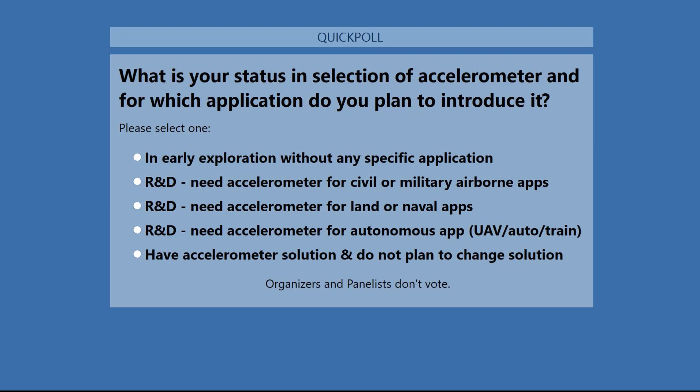But before we hear from each of these distinguished gentlemen, Lori, let's learn a little bit more about our audience. Let's do that. So you should see a poll coming up on your screen. If you wouldn't mind weighing in, we'd love to hear from each of you. The question is, what is your status in selection of accelerometer, and for which application do you plan to introduce it? Just select one answer. Responses are in early exploration without any specific application, in R&D and need accelerometer for civil or military airborne apps, in R&D and need accelerometer for land or naval apps, in R&D and need accelerometer for autonomous apps, or have an accelerometer solution and do not plan to change that solution.

So it looks like 36% in early exploration without any specific application, 23% R&D and need accelerometer for civil or military airborne apps, 10% R&D need accelerometer for land or naval apps, 17% R&D need accelerometer for autonomous apps, and 15% saying have accelerometer solution and do not plan to change solution.

So Alan, any thoughts here on this poll? Well, I think everyone is just about where they want to be, which is in the right place, ready to learn more about the new possibilities of accelerometers, except for the 15% who do not plan to change. But I have a feeling that even they will learn something to their profit. A third of the audience is in early exploration, and the rest are in various fields. Of course, this is going to be of interest to Thales and all of us as to which fields they are in. I think everybody, regardless of your application, you're going to learn something to your advantage.

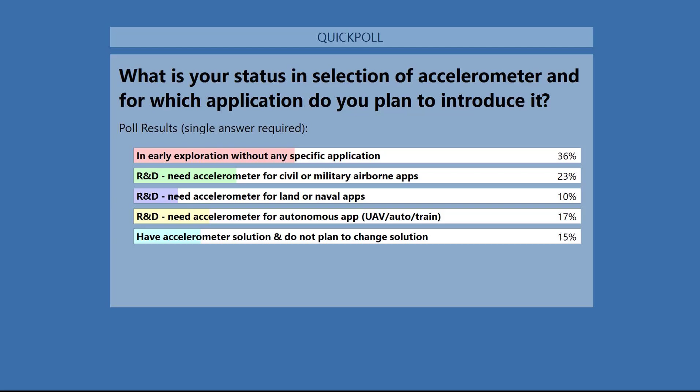We're going to hear first from Vivien Lagorce, who is the MEMS sensor project manager at Thales. He graduated in electrical engineering from Grenoble Institute in France and joined Thales Group in 2009. At Thales, Vivien has carried out the development of several power supply electronic products embedded in airborne applications, such as flight controllers, GNSS receivers, and inertial navigation systems. He has been in charge of their airworthiness certification process regarding European and U.S. regulations, and now Vivien is the project leader of the new high-grade accelerometer and gyroscope based on silicon microelectromechanical systems, in other words, Si-MEMS, and as you'll see frequently throughout the presentations, Si-A, or silicon based accelerometers. These sensors combine compactness with high-level performance.

Vivien, please proceed. Yeah, thanks, Alan, for this introduction. And thanks a lot to the webinar attendees. I'm glad to present you today the new generation of Thales high-grade accelerometer and how we're offering a user-friendly solution combining compactness and performance. First of all, let me introduce Thales and its experience in inertial technology.

Since 1980, Thales is embedded in major civil and military programs requiring high-grade inertial systems. Our expertise is based on our technological knowledge with more than 1,000 patents. We provide inertial systems based on our own sensors developed and manufactured, such as ring laser gyroscope and pendulous accelerometer, or also quartz MEMS accelerometer. In addition, our expertise in GNSS allows us to provide one of the most performant inertial systems. Today, we deliver more than 10,000 navigation systems per year and accumulate more than 300,000 MEMS sensors in silicon and quartz technology. Our MEMS sensors accumulate more than 1.5 billion operating hours in safety critical applications.

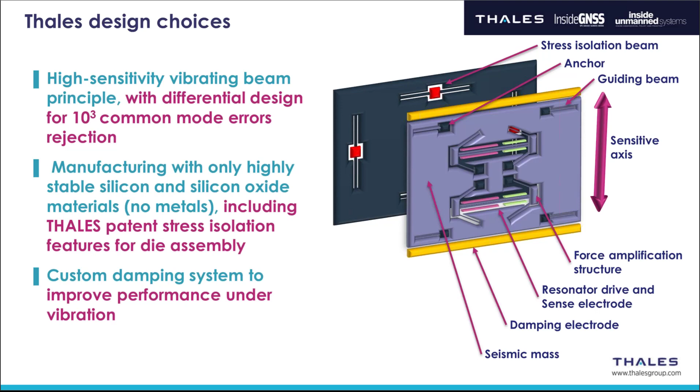We have also integrated a custom active damping system here, which allows us to improve performance under vibrations. Manufacturing of the cells uses only highly stable silicon and silicon oxide material, including the Thales patented stress isolation features for die assembly, located at the bottom silicon layer to link the active layer to the packaging.

All these principles come from several years of research to provide the best bias performance over the whole temperature range. This is a particularly important requirement, for example, in missile guidance applications with high temperature variations. Even if the physical principle seems to be complex, its use should remain simple for you. For that, we have designed the electronics to facilitate communication with the sensor and its use.

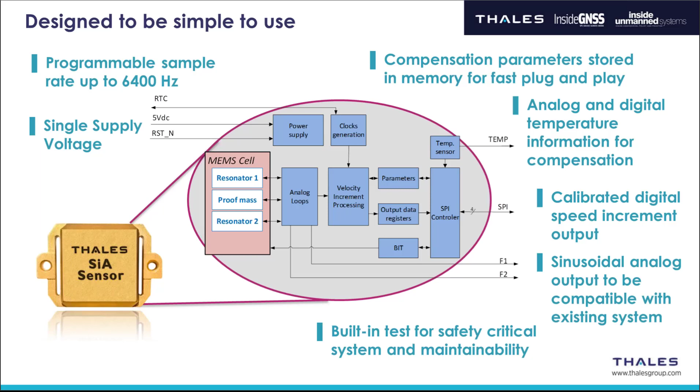Now, let me introduce our manufacturing line. Our silicon MEMS cell was designed by Thales engineers, then manufactured by Tronics. This collaboration of several years with one of the leaders in French MEMS manufacturing results in a high-grade MEMS accelerometer using a robust and standard industrial process.

Once the MEMS cell is manufactured by Tronics, the sensor integration, calibration and acceptance are performed in a Thales facility using a new smart manufacturing line, which has a production capacity higher than 30,000 sensors a year and allows us to adapt logistics to your needs, of course. For example, we can integrate vendor managed inventory processes to manage your stock easily. Finally, Thales guarantees your product availability and support throughout all your product life, however long.

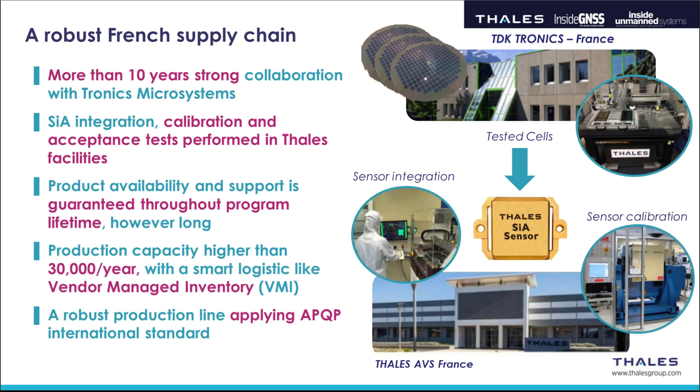But performance and reliability of the sensor also result from a controlled development process for safety-critical applications like civil aviation, autonomous vehicles, or train transportation. Based on our experience in safety-critical applications, we have applied the DO-254 aeronautic development methodology in order to prevent any potential failure. We have followed a rigorous methodology standard to trace every step of the development phase, from requirement capture to final verification of the sensor.

For each step of development, accurate documentation justifying the activities performed and their results is provided. This data package, including plans, specifications, verification and results, will be available for the certification process of your product. Of course, Thales will support you during your certification process with airworthiness authorities.

In addition to the development methodology, the sensor is designed to meet the high-grade inertial lifetime of 25 years and a reliability of 160 FIT, which makes it compatible with the primary navigation channel for civil long-range aircraft.

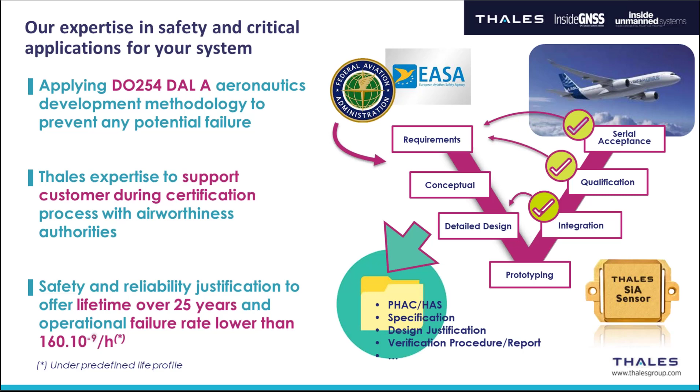Finally, choosing Thales is not simply for its high-performance sensor, but also for support from your sensor selection to your serial production, with a complete and accurate user guide to integrate our silicon accelerometer easily in your system. We support your system integration in order to find a good compromise to meet your product objectives. We support you in your certification process, as said, by offering engineering support and a full data package.

Then we provide you a sensor coming from a qualified manufacturing line, which meets the most rigorous standards for this kind of performance. Finally, we will be by your side anytime and anywhere thanks to our worldwide Thales network.

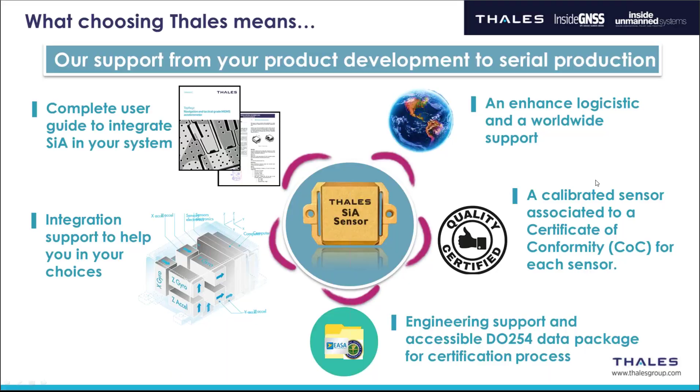Thank you, Vivien, for that look inside the sensor. Now we know what we're talking about. I have a couple of questions for you, but I'll hold those for a little bit longer. We're going to look next at the market, the MEMS market. Following some questions, we'll take a look at some actual applications of the sensor and then return for a closer look at some of the specifications of the sensor.

We're going to hear next from Damianos, a technology and market analyst, imaging and MEMS, for Yole Développement. Dimitrios Damianos, PhD, joined Yole Développement as a technology and market analyst in the photonics and sensing division.

He works every day with his team to deliver valuable technology and market reports, as well as custom consulting projects regarding the imaging and sensor industry, including photonics and MEMS. He holds a bachelor's degree in physics and a master's degree in photonics from the University of Patras in Greece.

After his research on theoretical and experimental quantum optics and laser light generation, Dimitrios completed his PhD at Grenoble University in France in optics and microelectronics. He has authored and co-authored several scientific papers in international peer-reviewed journals. Dimitrios, tell us about MEMS history and market.

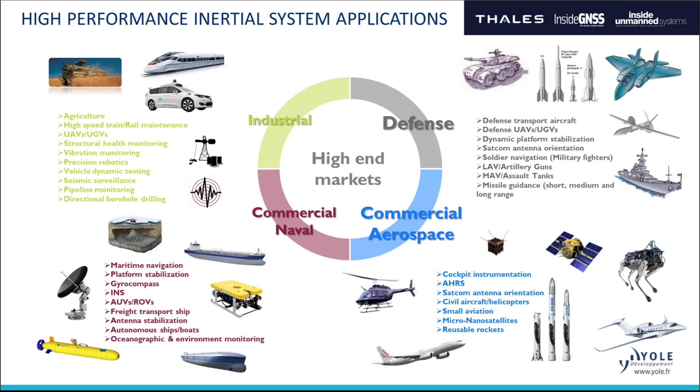So now each of these applications has its own requirements, which can be the level of integration and the performance as well. At the integration level, the systems can either use a standalone accelerometer, standalone gyros, or IMUs, INS, AHRS, etc. So performance needs are also different. For example, you can't use an IMU for navigating a ship and the same IMU for guiding a missile. Shock requirements are different, in-run stability, bias drift are different, etc.

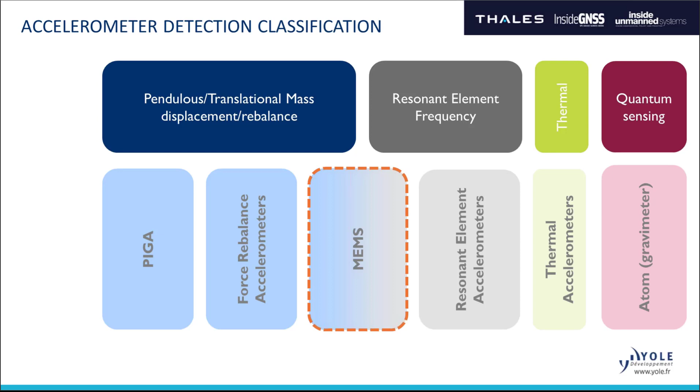Now, let me focus slightly on accelerometers. There are more or less 4 families or detection principles that you can see here in the slide, and 6 accelerometer types. So MEMS are currently a very hot topic because they can be greatly miniaturized, and also they offer one of the most promising SWaP-C. So they gain a lot of traction in many applications.

Regarding high-end accelerometer performance, these are categorized in 4 main grades: the strategic, navigation, tactical, and industrial grade. And the 2 main parameters for this classification are day-to-day bias stability and scale factor stability. And the applications that I showed earlier can be categorized in one of these 4 performance grades. So as you can understand, they will need different silicon MEMS accelerometers or other kinds of accelerometers.

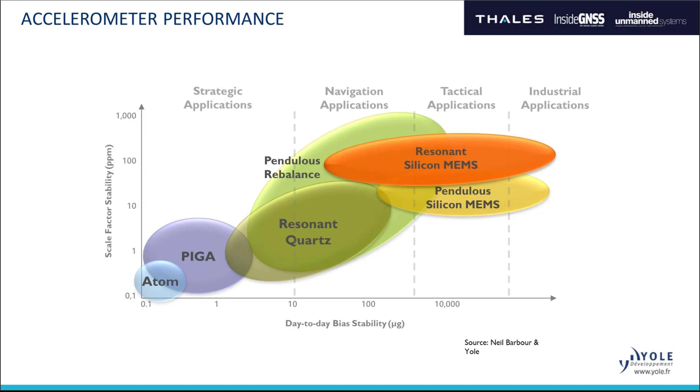Without going into too much detail, as I said, day-to-day bias stability refers to how stable the output of the accelerometer is over time, and the scale factor stability is actually the linearity of the sensor. So silicon MEMS are pushing the limits of their performance and have reached the navigation grade, meaning they can address most of the applications.

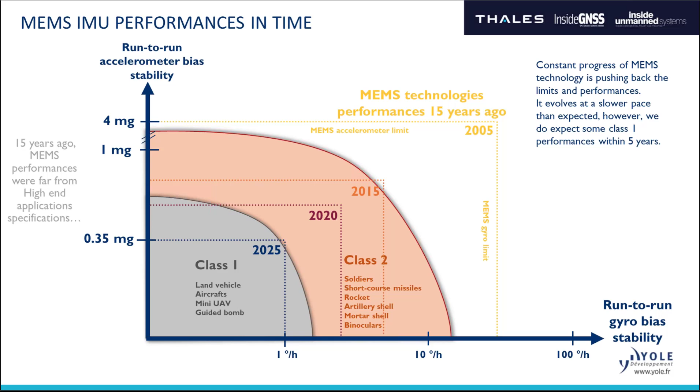Now, as I said, accelerometers can also be integrated in IMUs. So when we see the whole picture, IMU performances have really evolved during the past 15 years. Then they were not even considered high-end, but now they're moving towards more critical applications. MEMS-based IMUs are already used in tactical and industrial performance-grade applications, but also some MEMS accelerometers are used in navigation-grade IMUs that integrate non-MEMS higher performance gyro technologies. So let's say MEMS accelerometers are also more advanced in performance than MEMS gyros.

And finally, let me show you briefly the size of the inertial systems market. When we talk about the high-end market, all inertial systems at all levels of integration, like standalone, IMU, INS, etc., including all accelerometer and gyro technologies, represented a 3.24 billion dollar market in 2019. Of that, the standalone silicon MEMS accelerometers were almost 200 million. We expect this market to grow up to 4.25 billion, of which $330 million will be for silicon MEMS accelerometers. So good growth opportunities, and the main growth drivers will be coming from industrial applications.

And just before closing, to put this into perspective, the inertial systems market for commercial applications, which is not the focus today, for example consumer, automotive, and medical, was 3.14 billion in 2019. We see that the sizes are similar in value, but when we talk about the commercial market, we talk about billions of units. In the high-end domain, it's in the 100,000s or maximum million range of units. And note that in the commercial market, combo sensors such as IMUs are slowly replacing the standalone inertial sensors as the packaging becomes better and costs come down while performances increase.

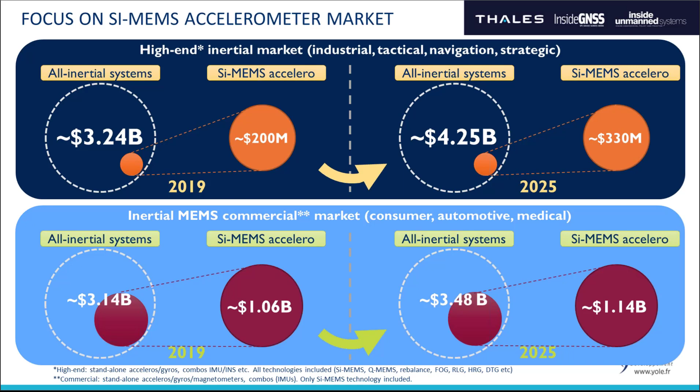Thank you, Dimitrios. To me, the most salient point is MEMS accelerometers are actually more advanced than MEMS gyros. We've devoted a lot of attention recently to gyros, but we see here that accelerometers are actually providing more capability and being integrated in navigation grade applications. We're going to pause for a few questions now from the audience.

Vivien, the silicon accelerometer sensor, is it available now? It's a good question. We are in an industrialization phase with the objective to qualify our manufacturing line to meet the industrial requirements necessary for this kind of sensor, like performance reproducibility or corner case detection. So samples will be available in mid-2021. And of course, we would be glad to discuss your needs now. All right, so conversations are open, and the sensor is coming very soon.

How do you qualify the sensor, Vivien? Our sensor is qualified in a representative environment for long-range aircraft. As you know, we have expertise in this kind of market, so we qualify the sensor for these harsh environments, like military environments. For that, we perform several tests in different thermal, humidity, shock, and EMI conditions applied directly on the sensor. But to have a good representation of the sensor's performance, qualification is performed on a representative population of sensors to verify the reproducibility of the performance.

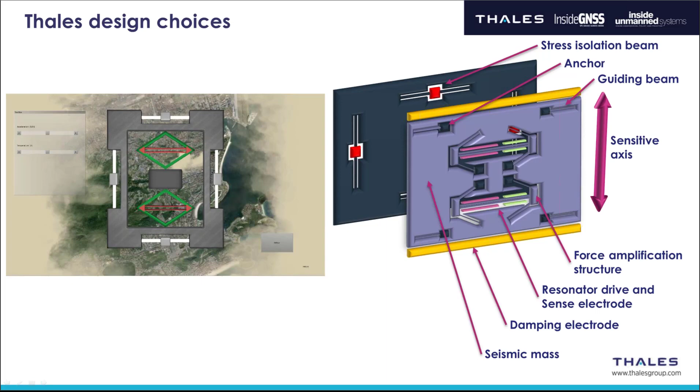Dimitrios, the question that comes up in almost every conversation nowadays: did you take into account the impact of COVID-19 in your forecasts? And if not, how do you foresee that changing the market landscape? In the market values I presented earlier, no, we didn't take it into account. These are results from right before COVID happened, around January and February. The effect we expect depends on the market and the end systems associated, but we expect an effect. So let's go through the four main markets. Military and defense is one of the foundations for some countries like the US and China.

And despite the economic slowdown, we expect this segment to remain strong, but maybe have a slower growth than before, but still not any significant impact. For example, for this year, the programs are there, the spending is going on, and maybe some deliveries could be slightly delayed since production is slowed down due to some disruption in the supply chain.

Now, commercial aerospace, everyone knows, hears, sees and feels it's the hardest hit segment. There were big supply chain problems in the previous months, and also reduced aircraft production is expected. On the other side, commercial naval market, not any significant changes expected, besides a slight decline maybe of some cruise ships and the usage of cruise ships.

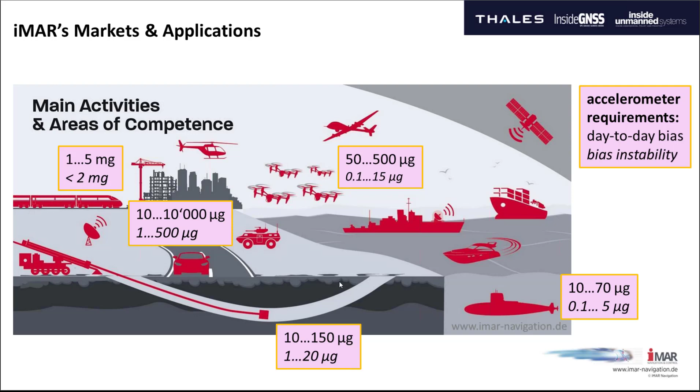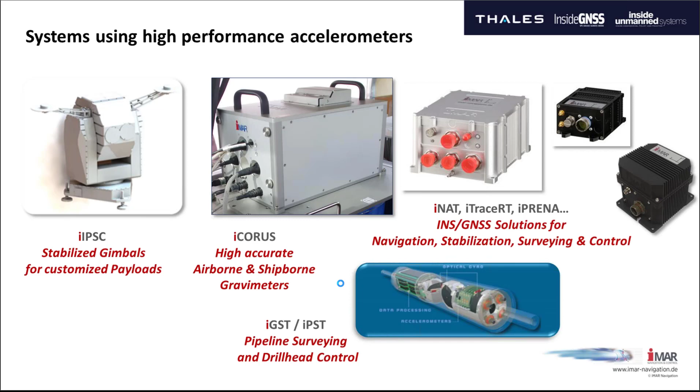High shock and vibration resistance and immunity is needed to minimize, for instance, rectification effects. High bandwidth, very small jitter, and a well-determined latency are mandatory for high-performance signal processing inside the INS/GNSS systems. Mechanical stiffness and long-time stability to obtain best orthogonality after calibration.

Deep self-testing capability and high MTBF of the sensors are crucial for designing and achieving highly reliable systems. And last but not least, a good synchronization capability as well as an integrated digitization helps the user to increase system performance, to simplify system design, and to reduce cost. So you see there are a lot of requirements which have to be fulfilled by these sensors.

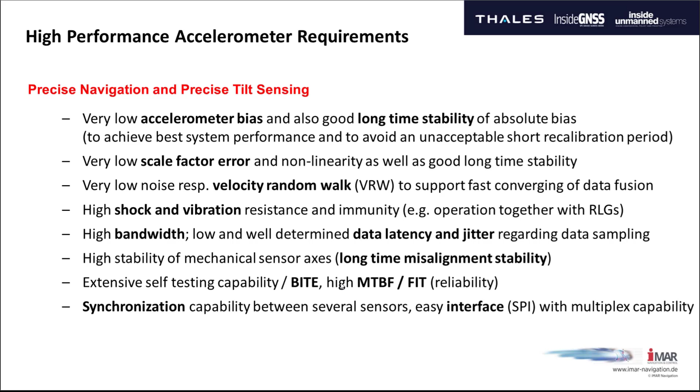For this purpose, the data fusion is used to extend the good inertial short-term performance to long-term mission applications and to estimate and compensate sensor impacts like bias or scale factor errors in real time. Better day-to-day sensor performance and low sensor noise help this data fusion to provide high performance results already within the shortest time. Typical aiding sensors are, for instance, GNSS, odometry, or computer vision-based navigation.

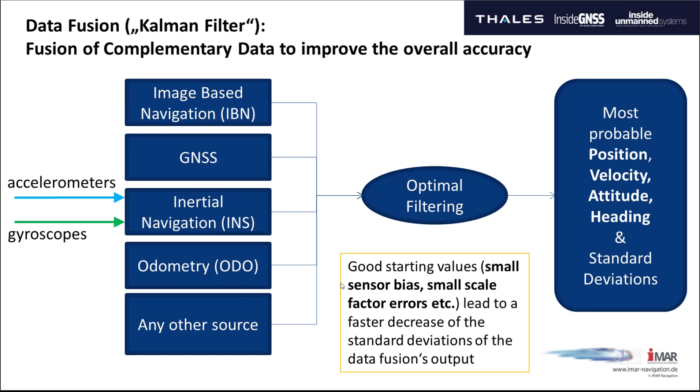During short-term navigation, the position error due to an accelerometer bias increases quadratically over time. A 1 milli-g bias leads after 10 seconds to half a meter position error. And if you do this for 1,000 seconds, of course, you already have 5 kilometers error. This shows why a very small bias is important.

Of course, most long-term navigation happens on the Earth, which is a gravitational sphere. And here, the so-called Schuler oscillation fortunately limits the increase of the position error to a linear function. In the plot on the right side, we see the Schuler period of 84 minutes as well as the 24-hour oscillation. Both can be obtained from the motion differential equation.

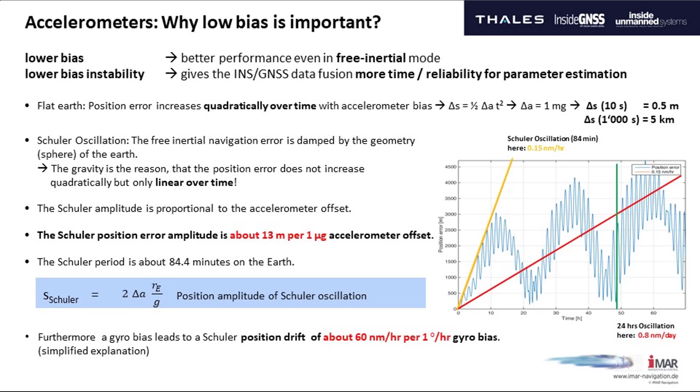Only to have a complete picture, the gyros also have an impact. The Schuler position drift is about 60 nautical miles per hour per 1 degree per hour gyro drift. This means not only the accelerometer is important, but also the gyroscope, and both have to fit together to meet the overall requirements of navigation.

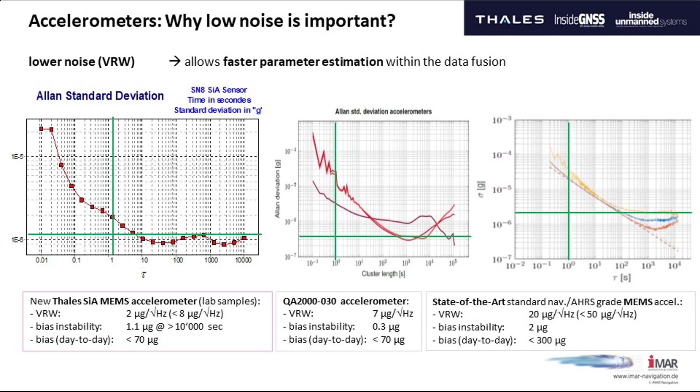A state-of-the-art MEMS AHRS grade accelerometer is shown on the right-hand plot. The left figure shows the Allan variance plot of the new Thales MEMS accelerometer, and we can see that it meets the QA2000 benchmark for the highest demands in navigation.

Finally, I'd like to explain why also a low latency and jitter of the accelerometer is very important for the system design and high-performance INS/GNSS systems. Acquiring an acceleration measurement value with a delay tau will lead to a significant navigation error. The reason is that the accelerometer always measures two parts, the desired motion-induced acceleration itself and the gravitational acceleration g of about 9.8 meters per second squared.

To eliminate the gravitational acceleration from the desired motion-induced acceleration, the orientation, that means the attitude of the object, has to be determined precisely by the gyros at that time when the acceleration is acquired. Also the jitter of the acceleration acquisition must be as small as possible. In other words, a jitter between orientation acquisition time and acceleration acquisition time leads to an error which is similar to a virtual time-variant acceleration offset.

As an example, to keep such virtual acceleration offset below 60 micro g, any jitter shall be less than 20 microseconds. This new sensor fulfills these requirements. This is an important impact which is mostly overlooked in system design, but of course gives you a big impact, especially navigating on the Earth.

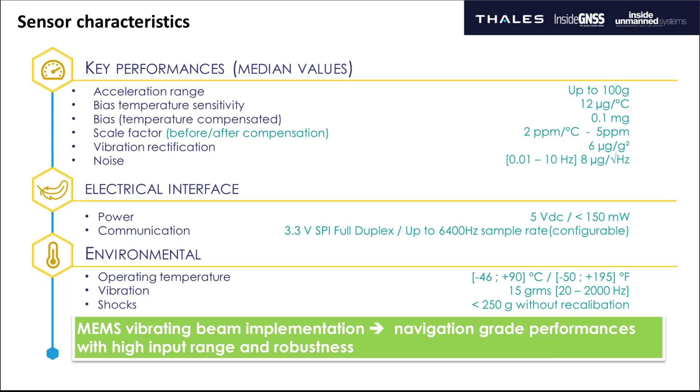I mentioned before wide temperature operating conditions, and this slide details now the features which are important to use the accelerometer efficiently in these conditions. In fact, any sensor is more or less temperature sensitive, and the important feature is the ability to perform temperature compensation using an embedded temperature sensor as a reference and compensation coefficients which are stored in sensor memory.

It is possible, if the sensor temperature susceptibility is sufficiently low and smooth, to introduce efficient temperature compensation. Also, non-compensable phenomena like temperature hysteresis of the bias shall be below the required accuracy.

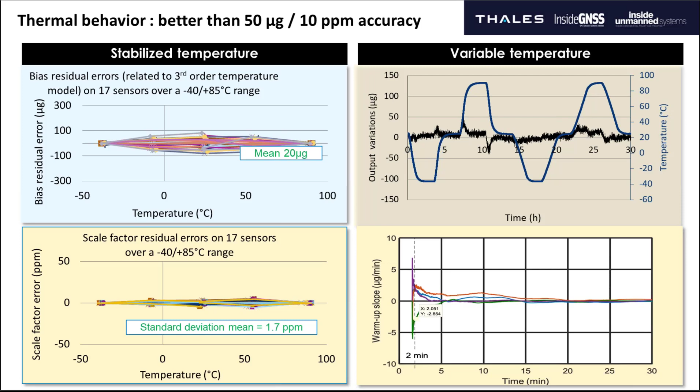With thermal sensitivity, aging sensitivity is also one of the most important features, and it's very difficult to evaluate for a new technology. The classical approach is to monitor response under artificial accelerated aging conditions. For example, high temperature aging or temperature cycling aging is performed, but the acceleration factor is not always easy to identify, and more critically, it can be low. So it's very difficult to do accelerated aging.

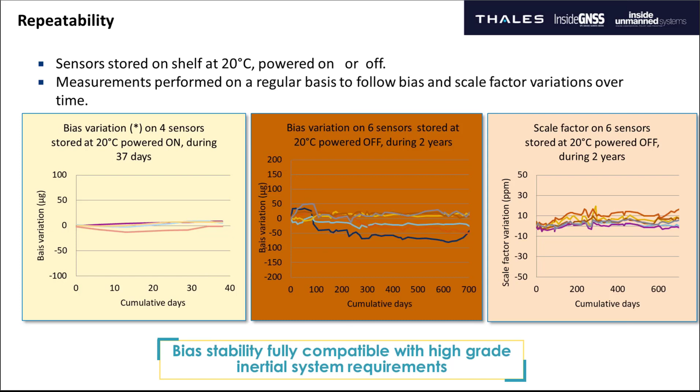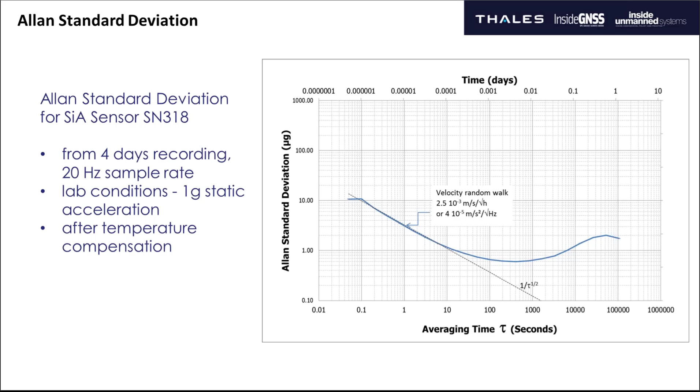This can also be converted into a vibration rectification coefficient, sometimes reported in sensor datasheets. Here the coefficient is in the 1 micro-G per G squared range, which is quite low for a MEMS sensor and even for any accelerometer technology. Compensation is not always required for quieter vibration environments, and the raw coefficient is around 6 micro-G per G squared. For example, without compensation, a 2G random vibration will induce only 24 micro-G error.

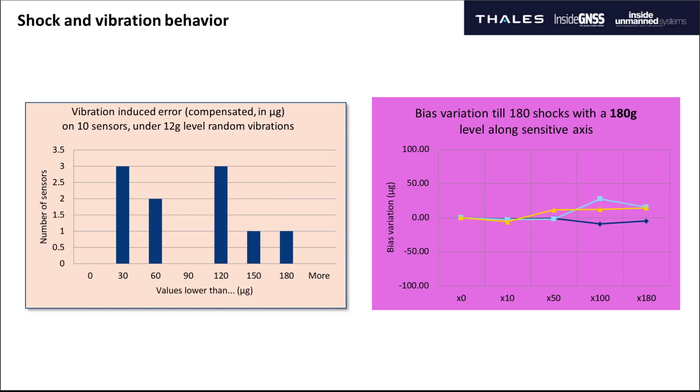I just showed you the performance level achieved with the SiA accelerometer, which I think represents a real gap compared to available MEMS devices. The heart of the sensor allowing these results is the sensing element built using a dedicated silicon technology. Silicon is well known for semiconductor manufacturing with smaller and smaller technology nodes down to a few nanometer critical dimension. But silicon is also an almost perfect crystal with impressive mechanical features. It's also a very good heat conductor, which is important to manage thermal behavior.

And the smaller dimension, the MEMS dimension, is the gap between the resonator and the driving electrodes, which is in the 3 micrometer range. And as Vivien mentioned, only monocrystalline silicon is used to benefit from 100% of silicon mechanical properties. And this allows us to build very good resonators for the vibrating beam with more than 100,000 quality coefficients, which is 5 to 10 times higher than for quartz resonators, which have been used on quartz vibrating accelerometers.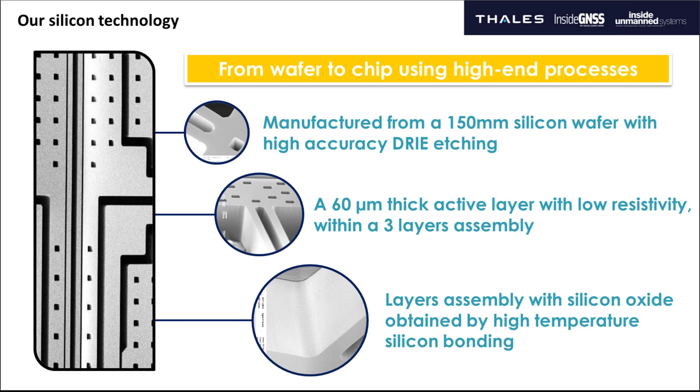And after this overview of MEMS technology and accelerometer performances, I will present the sensor interface and integration features. From a mechanical point of view, one of the most common integration configurations is a 3-axis combination associated to navigation-grade gyrometers. MEMS gyrometer performances are today not sufficient to address high-grade pure inertial applications, and the SiA accelerometer should be associated to fiber optic or ring laser gyrometers for the moment. And the small vibration sensitivity of the SiA device will be very useful when associated to ring laser gyros, as their dithering function will induce medium to high vibration levels. And the low power is also useful to avoid overheating of sensitive optical devices.

And as the sensitive axis of the accelerometers, represented here, is parallel to its mounting plane, it's possible to build a very flat triaxial configuration, like the one shown here on the slide, and only a 24 millimeter thick triaxial assembly inside a 60 millimeter diameter cylinder is possible.

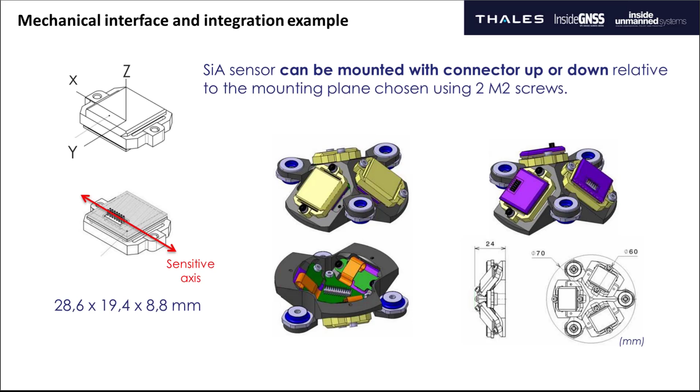From an electronic integration point of view, the main feature of the SiA sensor is the versatility of the output signals. The SPI line will be the preferred communication link to users' equipment, with access to digitalized velocity increment data and sensor temperature data. And communication integrity can be checked using CRC data, also available through the SPI registers. These electronic interface requirements could be compared to the acquisition electronics required for classical analog current output accelerometers, which require the use of a high-performance analog-to-digital converter with up to 24-bit accuracy maintained over temperature and lifetime, which is a bit challenging. This means less than 1 ppm electronic accuracy.

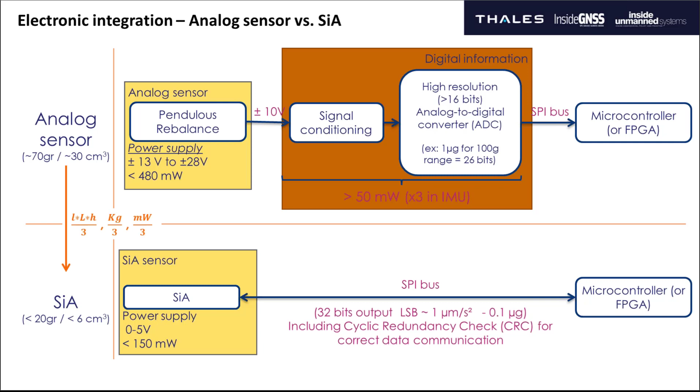If digital output is used, we are in the discrete time regime. So it is mandatory to implement a synchronization function to have the same sampling time for each accelerometer of a triaxial configuration. And two modes are offered to define the speed increment sampling time. On the left, sampling time is defined by one of the accelerometers set in master mode, and the sampling signal delivered by the master is used by the two other accelerometers set in slave mode, and also sent to the user for synchronization with other devices. And on the right, more classical perhaps, the other mode is to have a sampling time defined by the user and sent to the three accelerometers set in slave mode. In any case, latency can be as low as 400 microseconds, depending on the data rate used, and the jitter in the sampling time is lower than 5 microseconds.

Finally, high reliability is also a key characteristic for any application, and especially for inertial systems often used for safety critical operation on ground and airborne platforms. From our experience in delivering MEMS sensors since 1995, MEMS technology allows us to reach a very high reliability level as there is no friction, very limited movement amplitude, and only a few assembly technologies. This is especially true with the vibrating beam principle. In the sensing element, under both normal operation and power off operation, there is no friction and no contact between silicon beams and masses. From a safety point of view, the issue is a bit different, and it is to avoid undetected failure. For this need, several built-in test features are introduced to monitor electronic health, but also to monitor the MEMS resonator health. And dedicated features are also included to limit single event effects from atmospheric radiation.

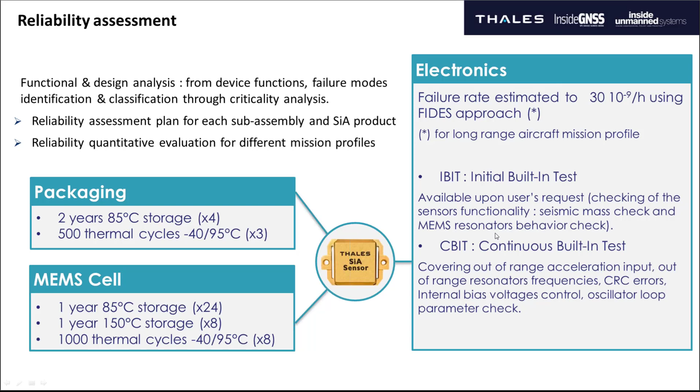Okay, on the screen is our third and final poll for today. Except for performance, what is the other key requirement your accelerometer should have? Small size, easy to communicate without export constraints, civil certification data package, or large portfolio for the same size of sensor.

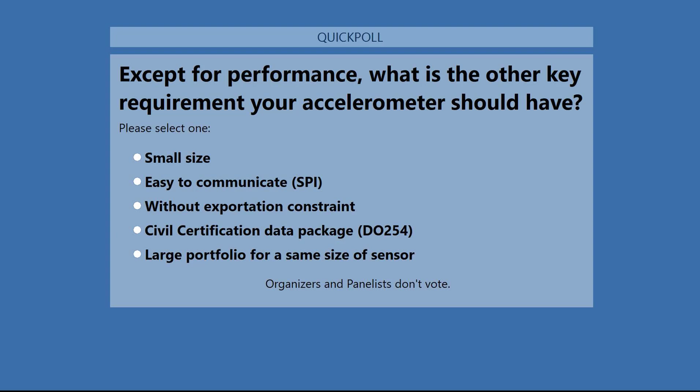Well, 39%, our majority here, saying small size, 23% easy to communicate, 24% without exportation constraint, 7% civil certification data package, and 6% large portfolio for same size sensor.

Alan? Well, as indicated in the SWAP acronym, size comes first. I think this is borne out by the survey here that getting performance in a small form factor is the leading consideration. However, communication and export controls also factor in, with the others being less significant.

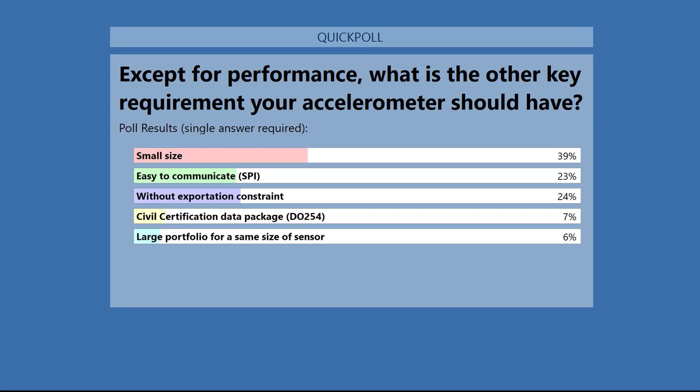We're going to turn now to questions from the audience. And first for Edgar. Edgar, harking back to your performance, what are the key advantages from a system designer's point of view in using this Thales MEMS accelerometer for high performance applications?

Oh, there are a lot of advantages in this technology, I think. One of the key points is that you do not have to recalibrate a system within a short period. Therefore, the long-term stability of parameters seems to be very interesting for us. Another point is from the signal processing.

On the one side, if you take a Q-flex traditional sensor, you have to take into account that the power dissipation inside of this sensor depends on your acceleration. So you have a current there of about 1.3, 1.4 milliamps per G. Therefore, the heat dissipation depends on the measured acceleration.

And this, of course, is a big advantage of this MEMS technology, that the power dissipation is more or less independent from that one. So it gives you a much better capability for modeling the temperature behavior. The scale factor, of course, is important. It will not help if you have an accelerometer which has a few micro G offset, but about 100 or 200 ppm scale factor error, because if you go into the field of gravity, then you see this as a bias.